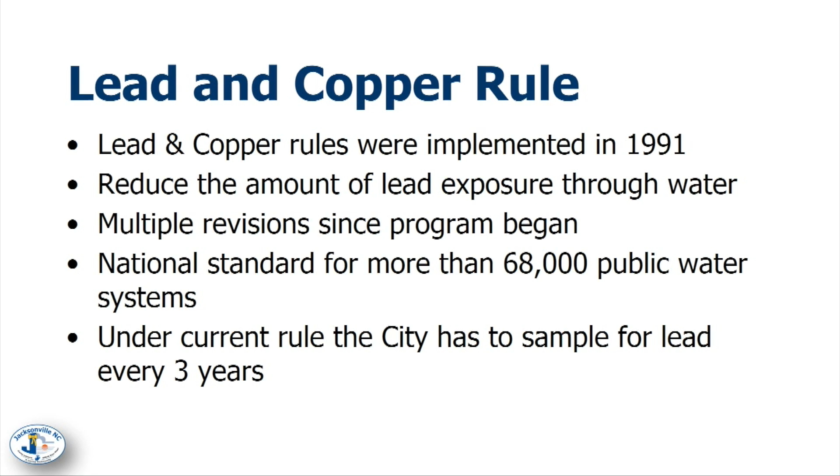Since that time, there have been multiple revisions to that rule. They apply across the country, so you're talking more than 68,000 public water systems that have to comply. Right now, the rule we're currently under, based on our system and our history, requires us to do lead sampling for our water system every 3 years.

What can change that is if you have findings, new things introduced into your system, or changes in your system—like the city has a partnership with ONWASA for a development out on Blue Creek School Road. That development is newly constructed, but because it's considered a new water system, not contiguous to our water system, we have to sample it for lead. There's no lead in that system because it was built under standards from literally 2 years ago, but we still have to follow and comply with the rule.

So the rule applies across the board. The latest revision we've talked about before applies to water service lines—not necessarily the water mains in the street, but primarily the service lines that lead up to an individual house, business, or commercial property. Where they're really focused is primarily on lines less than 2 inches, because historically lead was not used in piping over 2 inches.

Right now the rule states that we have to go out and identify any lead service lines in our system. We're going to talk a little more about that in a minute, and I'll give you an overview and discuss some of the challenges we face. The big thing we expect this will lead to is at some point they're going to say, 'Now you've identified them, get them out of your system.' And if you think it's going to be expensive to identify them, think about how expensive it's going to be to get them out of a system. So what we're talking about is, again, that service line.

You have the water main in the street, and a water service line that leads out of the street. In the city, for a house or commercial resident, you're typically talking about a 3/4 to 1 inch pipe that leads up behind the sidewalk to a water meter. From the meter, it goes across the front yard of the house or business and into the building. So at the bottom, we show what's the city's responsibility and what the property owner owns.

So if we go to a call for a water service leak, if it's at the meter, even if it's on the resident side of the meter, or anywhere from the meter to the street, it is the city's responsibility. That's the area marked City of Jacksonville underneath. From the meter to the resident, it's actually the property owner's responsibility.

So let's say there's a tree in the front yard behind the meter. Roots like water, so over time a small leak forms, a root gets in, and it creates a larger leak. The property owner is responsible for that.

If you have a company putting in fiber in the street and they nick the water service under the sidewalk or in the street, the city, through that company, is responsible for that. Or if we mismark something, the city is responsible for that.

That's a general overview that applies pretty much across the country. There are a few, very few, jurisdictions that have adopted ordinances saying everything from the main to the house or business is the property owner's responsibility, and just the meter belongs to the city or water provider, who owns and provides it.

The challenge with that approach is, if something happens in the street, how many residents can truly afford to come make a repair and then fix the street to the standard it needs to be? So it's really not a realistic standard.

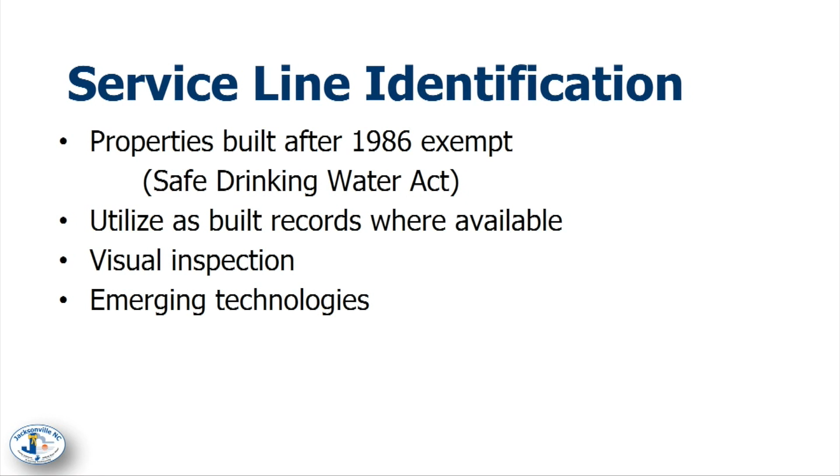The other thing you can do is a visual inspection, which I'll show you in a minute, or you can use some sort of emerging technology, which we've talked about with you in the past, and I'm going to give you an update on that.

I can tell you most of what we have in our system that we've found so far is plastic and galvanized. We haven't done a ton of inspections yet, but everything we've inspected, we've found galvanized or plastic.

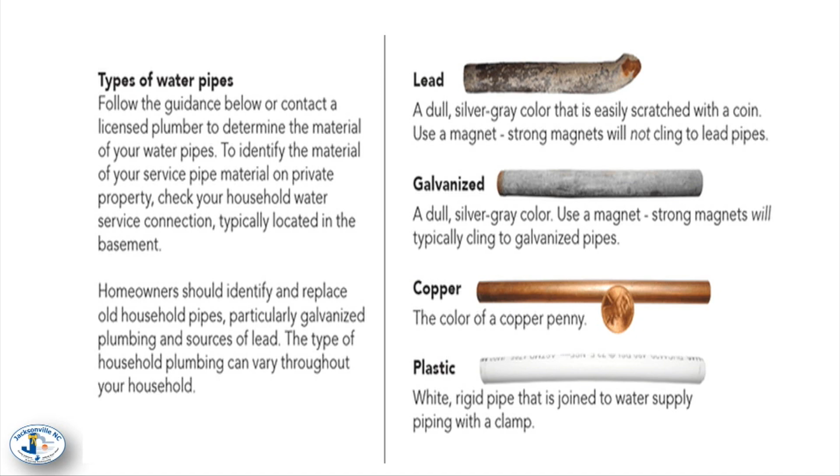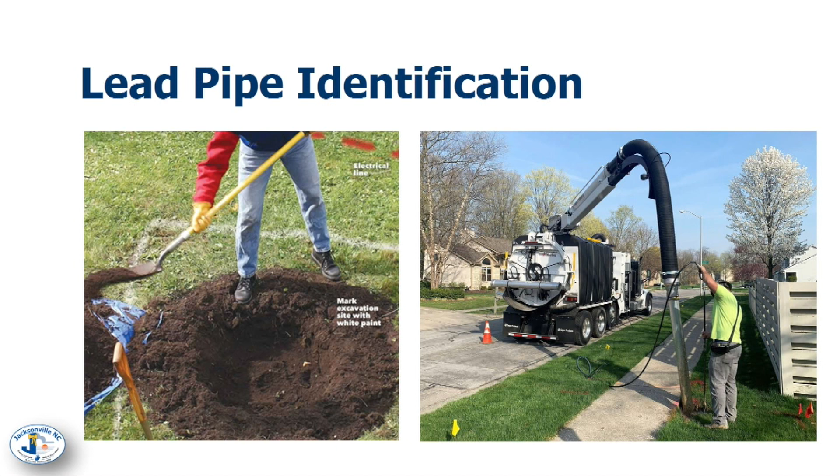So the first way is visual identification. We literally go out, dig a hole, look at the pipe, do the scratch test or whatever we need to do, and then document it, cover it up, and go to the next house.

The other way is to use a vacuum truck and do what they call hydro excavating. You go out and literally suck out a hole using water and vacuum, creating a nice round hole to inspect. The problem is that's a very expensive piece of equipment to tie up doing that when we already have two in our system running full-time 5 to 6 days a week. But it is a method that can be used.

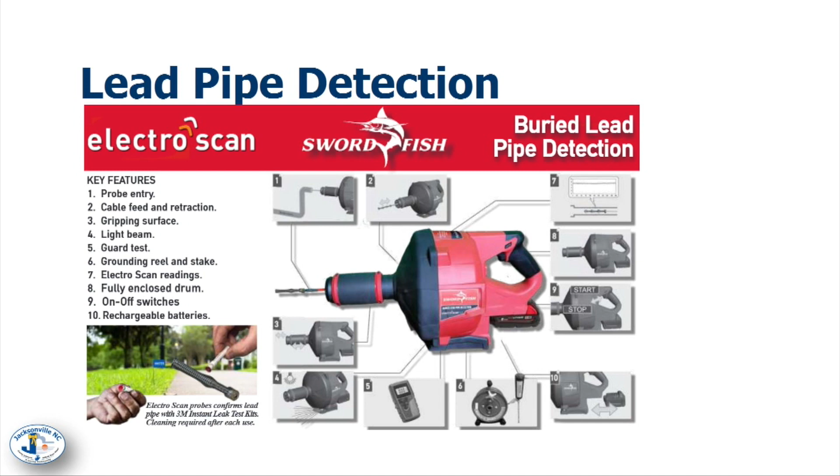The other one that the city had identified as an emerging technology was the swordfish unit. This is what it looks like. You pull the meter out, feed a probe toward the house, pull it back out, feed it toward the road, and you get both sides.

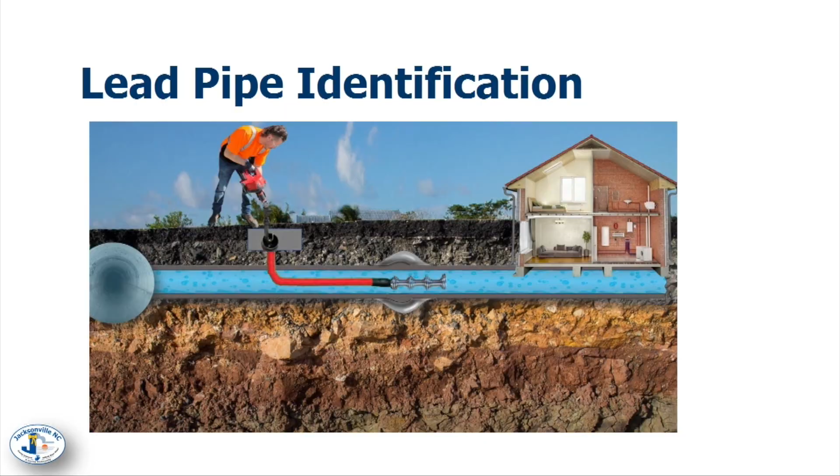The way this works—we actually had a demonstration and it worked very well—is the different material types provide a resistance to the signal sent. The best way I can say it is plastic doesn't conduct electricity, metal does. And depending on the type of metal, it conducts at a better rate. Lead conducts it very well.

So when they send out a signal using this probe from inside the pipe, lead typically gets a 95% plus return rate for the signal, whereas plastic is under 10%. Galvanized, I want to say, was between 60 and 80. I don't remember copper, but it is obvious when we're doing the demonstration what the material is.

The problem is the state—we submitted our plan to the state, they reviewed it, made contact with EPA, they reviewed it and denied it.

Really? Yes. So the concern is the probe, as it moves through the inside of the wall, could knock scale loose and knock things loose into the water.

We had prepared for that and put together a plan where we would flush every house for a minimum of 10 to 20 minutes, depending on the house. If you find plastic, less time. If you find metal or lead, much longer. So we thought that was a viable plan.

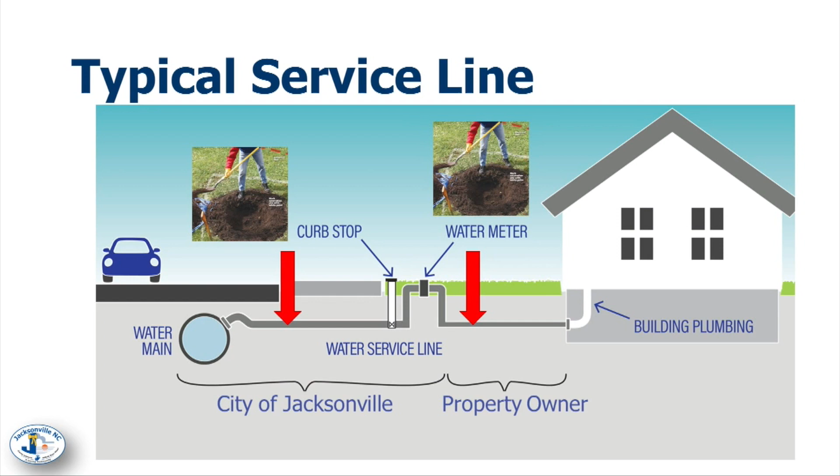So we are back to digging. And I hate to say it, but we have to dig more than once because we have to identify both sides. Part of the reason for discussing this with you tonight is there's a lot of people that are very particular about their yards. Metronet has been out there digging up people's yards, Brightspeed is currently doing it right now, and the city of Jacksonville is not going to be far behind them. Now the catch for us is it should be a smaller pothole, literally just big enough that we can identify what's needed.

I'll talk to you a minute about how we plan to do this. Do most of these service lines on the city side have grass areas, or a lot that don't? The good thing is, while our little graphic doesn't really show a grass strip, most of ours in residential areas do. Most of ours we have what we call a 3-foot utility strip that we can work in.

Where we don't have that, we will be right up behind the meter. So we will do our absolute best not to take up road or sidewalk, because that'll get expensive real fast. Save those till the end.

So we have some things we've been working on following the determination from the state. We've developed a plan, and I'll give you a brief overview. Anytime we go out to make a repair, we document it, we identify it. We're there, we're digging, it makes sense. So we're already doing that, and we've already done over 100 of those.

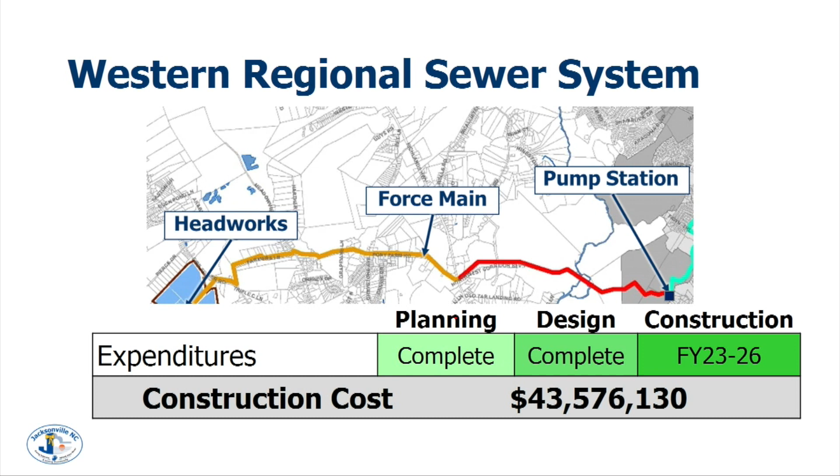Yes, sir. Thank you, Mr. Chair. I'm going to talk to you today about the Western Regional Sewer System. This is actually Randa Souls' project, but I'm going to talk about it for her tonight as she's not able to be with us. The estimated cost for construction is over $43 million. The construction is supposed to take place between fiscal year 23 to 26. We actually started in fiscal year 24, as we're in fiscal year 24 now.

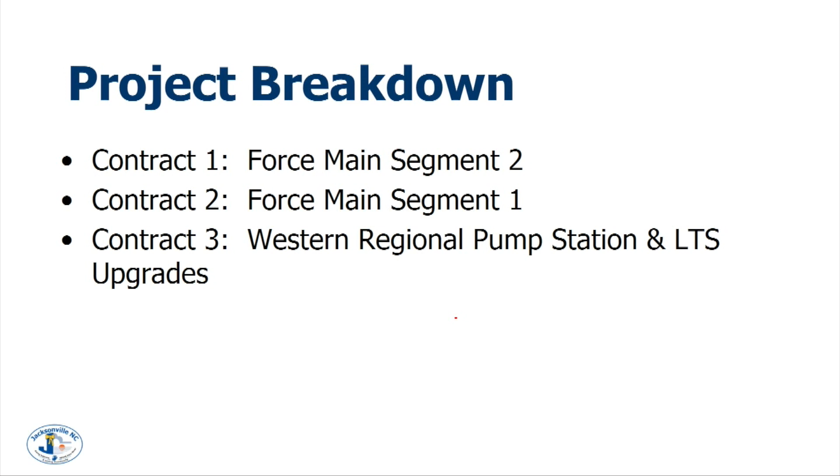The project breakdown consists of 3 contracts. The first one being Force Main Segment 2, which is what we're in as of right now. The second one is Force Main Segment 1. And the third one is Western Regional Pump Station and LTS upgrades.

Part of the funding is coming from a grant from NCDEQ, which is over $23 million. Funds will need to be spent by December of 2026, which should not be an issue, obviously. And a large credit should go to Senator Lazzara because he brought us the $20 million. Awesome.

So this screen here shows you what area contract 1 is referring to. That's from the LTS plant out on Fire Tower Road up to Pony Farm Road. And that's actually Segment 2 Force Main.

So did you say that is underway? That is underway, yes, sir. So how long has that been going on? They've been clearing and grubbing a little over a month. Okay, so they've just started. How much was that first phase? 13 million. Yeah, I was going to say right at, maybe close to 14, but it was in the 13 to 14 range.

Carolina Utilities. Yeah, I think I did hear that. So contract 1, once again, is the force main. There's 20,000 linear feet of 36-inch PVC, and 20,000 linear feet of 1.5-inch conduit to be installed.

As I said, the clearing and grubbing is underway, and the pipe is scheduled to be delivered the middle of November. We are anticipating construction to be around 395 days.

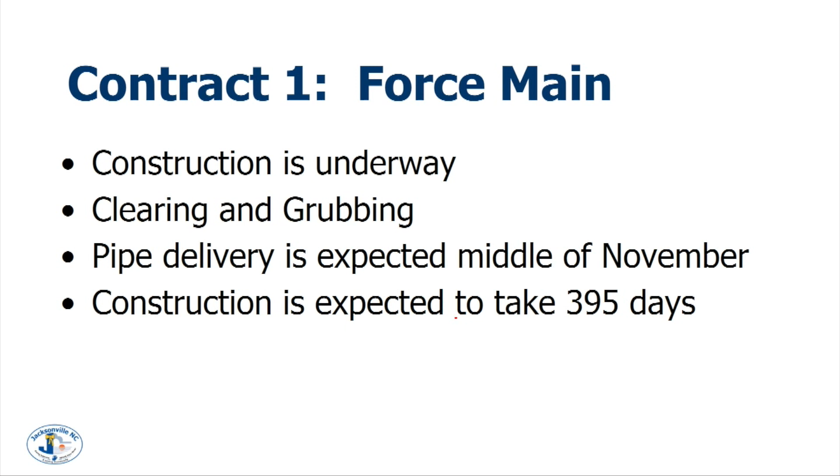Could you go back one? What's the linear feet, 1.5-inch? What's the conduit, fiber? You're gonna put something beside the pipe? Since we're digging, the idea is we'll bench up, and I think it's actually 2 runs of 1.5-inch fiber, and it will carry out to the land treatment site. Right now, we lease fiber for all of our operations at LTS, so we're reliant on Spectrum, and we have a lot of problems.

Anybody familiar with delays, and of course we're in the county, in a rural area, so it really is a challenge for us. So the contractor's installing conduit for you, and at some point you'll come back and pull fiber. It'll be a dark conduit. They're putting in the handholes and everything too.

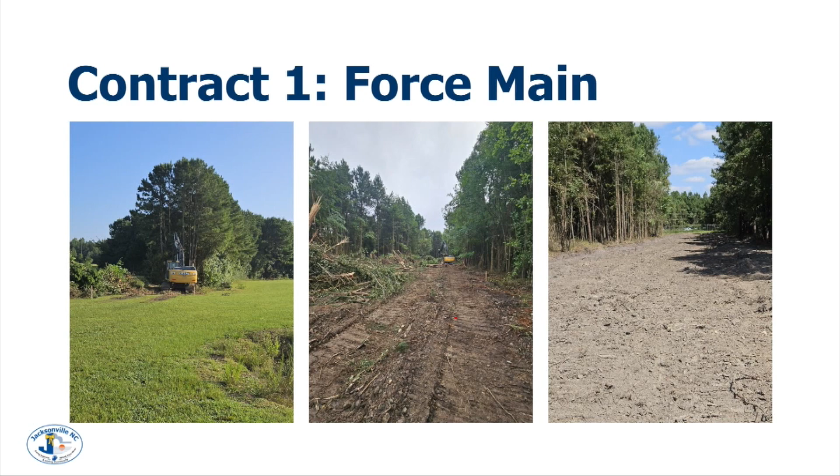When's that gonna be bid? I'm fixing to get to that, yes sir. So we're gonna bid that in January of 2024. The idea was to let the contractor get started, get a little overlap, because they do have to tie together, so you need one ahead of the other.

Once again, the construction for this one's anticipated for 395 days. We're installing 12,000 linear feet of the 36-inch PVC. The challenge with this one's gonna be including the directional bore that's gonna go under New River.

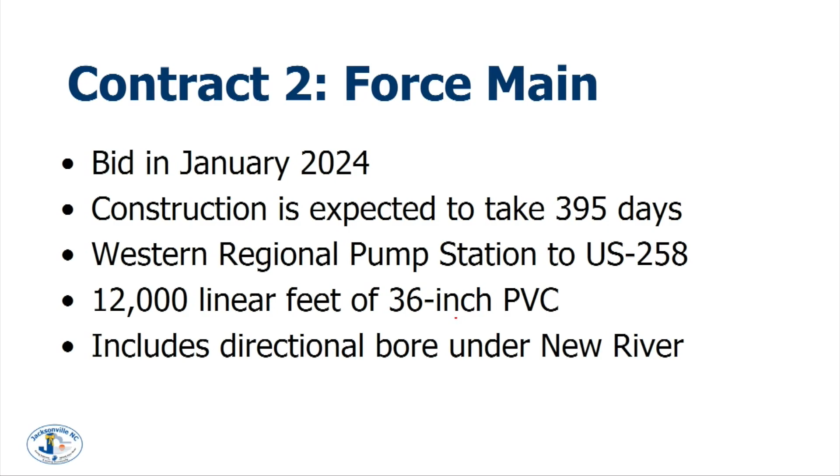And it's a long directional bore too. How long is it? I want to say it's 1,100 or 1,200 feet. So we did one, 10, 12 years ago. It was one of our projects we got on base where we had an 8-inch from Hospital Point over to the firing ranges. So it was a mile, 5,200 feet or something. And then another one from the air station over there that was probably 1,100 or 1,200 feet.

So that is one heck of an operation. It is, and it takes a long way to lay out that pipe, especially a mile. Man, I've done 900's, the farthest I've gone, and it posed problems. It tried to float up on us, so it's interesting.

It doesn't say it up there, but there's conduit included in this section also. So when the overall project gets finished, the conduit will tie in at the intersection to fiber we have at the intersection of Western and Gum Branch, that signal system, tie in there and go all the way across to Pony Farm and 258, and then out to LTS. So it'll tie all that together.

Some of that conduit, we've actually talked about, at least the county needs fiber to their buildings. One of the things they've identified they really need is to be able to connect their EOC, which is in the Commons, to their governmental building, which is in Burton Park. So there's been a discussion of them leasing one of those conduits that we're installing for their fiber.

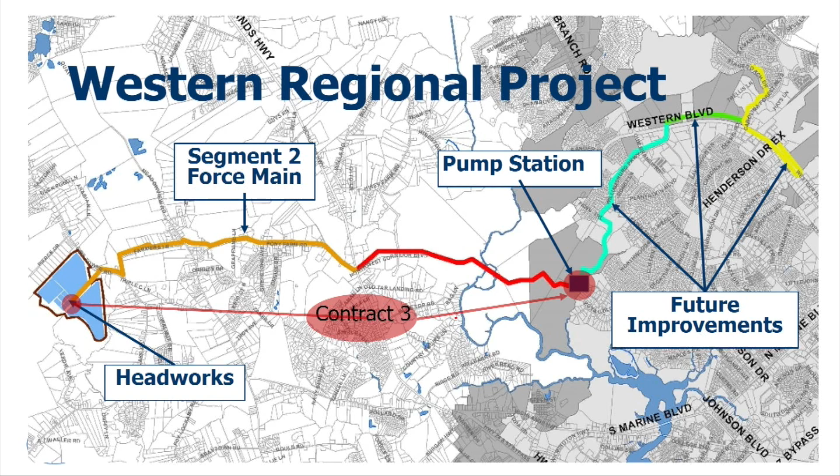This slide here shows the final phase, which is contract 3. There will be improvements to LTS there at Fire Tower Road, and then also the building of the pump station. That one is scheduled to bid in the fall of 2024.

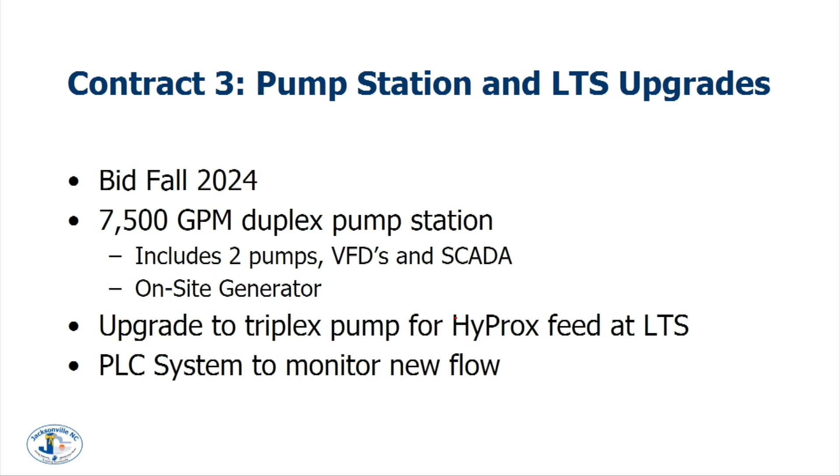We'll be installing a 7,500 GPM duplex pump station, which will include 2 pumps, VFDs, and SCADA, and also an on-site generator. We will also be upgrading to a triplex pump for the hydrogen peroxide feed at LTS, and also a PLC system upgrade to monitor the new flow coming in.

So compared to the main, or what we have now, what's our main one? This is 7,500. What's the one we got now? It's 7 miles - no, I'm talking about the GPM, the gallons per minute. Oh my goodness, it can handle a peak of 21.5 million gallons a day, so whatever that would be, I gotta do the math. Think about that. That's fine, give me a minute, I'll figure it out for you.

So they're almost comparable, that's what I was getting at. It's almost like doubling your ability there. And that's all I have on that.

Do y'all have any questions? Oh sorry, about the hydrogen peroxide upgrades.

The hydrogen peroxide that we feed currently is not a permit requirement. It's in our permit, but it's not a treatment requirement. We actually feed that to be good neighbors. It takes the sulfur smell and the hydrogen sulfide gas smell - that kind of smell, I don't know how else to say it. It's not methane, but it's that kind of smell, and it takes that out. So we like to be good neighbors. That hydrogen peroxide feed is not for treatment, it's actually to remove odor.